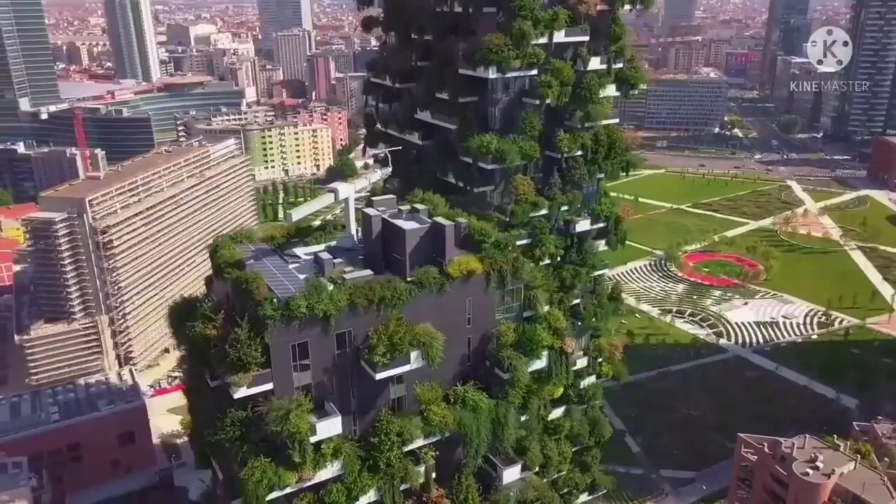When you read the phrase green building technology, someone with even a tiny amount of knowledge about engineering or construction materials would guess that it is associated with environmental conservation or something concerning the environment. Those with an IT background might think that GBT, green building technology, is a new piece of software for designing eco-friendly structures. Basically, if we learn how green building technology helps in the conservation of the environment and then try to adopt certain techniques to save the ecosystem through such measures, it will help our current situation a great deal.

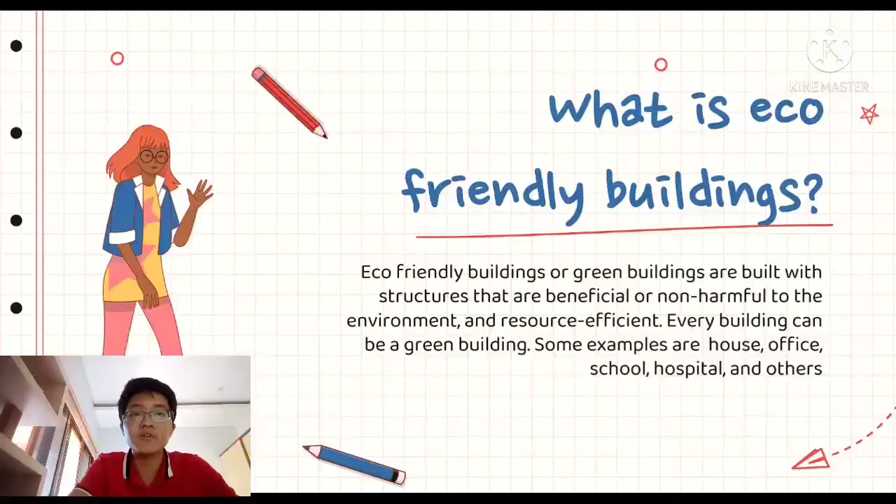From the video, we know what eco-friendly building is. Eco-friendly buildings are usually called green buildings. These are buildings built with a structure that is beneficial or non-harmful to the environment and resource efficient. Every building can be a green building, for example a school, house, office, and many other buildings.

Next is the history of eco-friendly building. Green buildings have been in existence from the moment humanity discovered construction, with growing calls for the construction industry to contribute towards sustainability efforts. The Building Research Establishment Environmental Assessment Method, or BREEAM, was initially set up in 1990. The Leadership in Energy and Environmental Design, or LEED, rating system on the other hand was established in 1998. These two entities were the pioneering oversight bodies with regards to setting the standard for building assessment, rating, and certification in line with environmental sustainability goals.

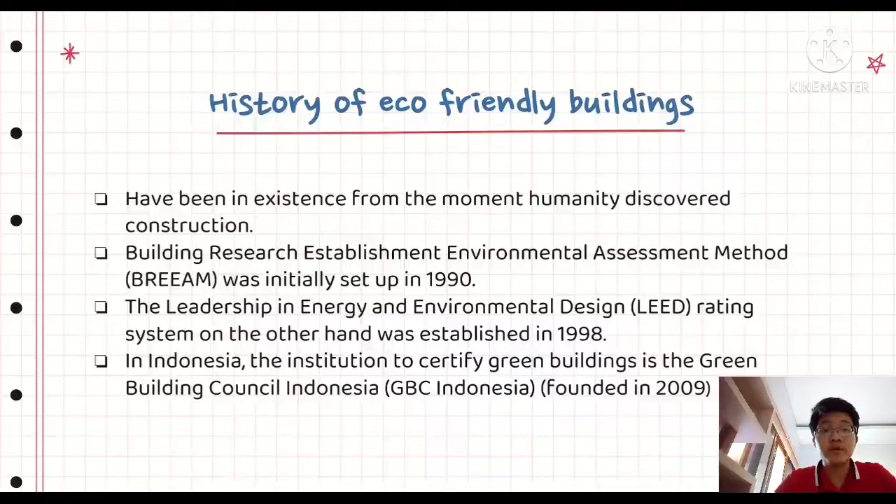In Indonesia, the institution to certify green buildings is the Green Building Council Indonesia, or GBC Indonesia. This institution was founded in 2009.

Next is the features of eco-friendly buildings. In green building construction, technology and buildings combine and create ecological resources that are the key to green success. Using simple and easily available materials, these are several features that can make a green building.

First, efficient use of energy, water, and other resources. Then, use of renewable energy such as solar energy. Next is pollution and waste reduction measures and the enabling of reuse and recycling. And next is good indoor environmental air quality and use of materials that are non-toxic, ethical, and sustainable.

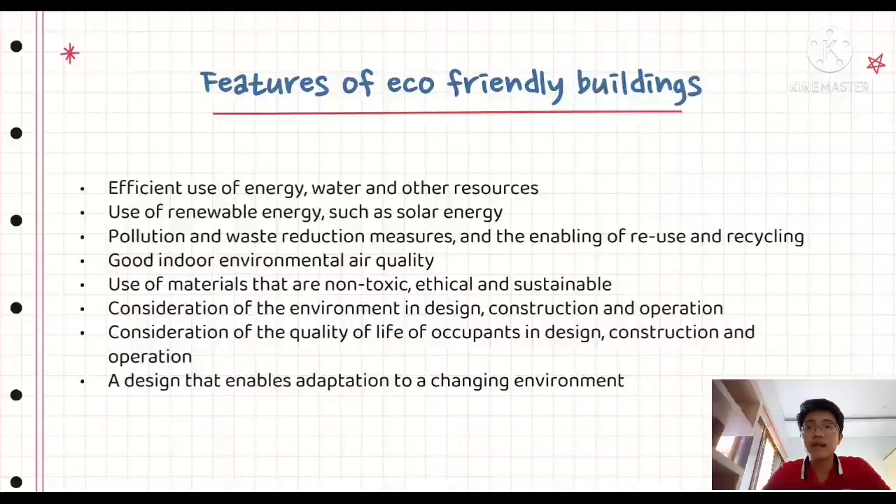Next is consideration of the environment in design, construction, and operation, and consideration of the quality of life of occupants in design, construction, and operation. And the last is a design that enables adaptation to a changing environment.

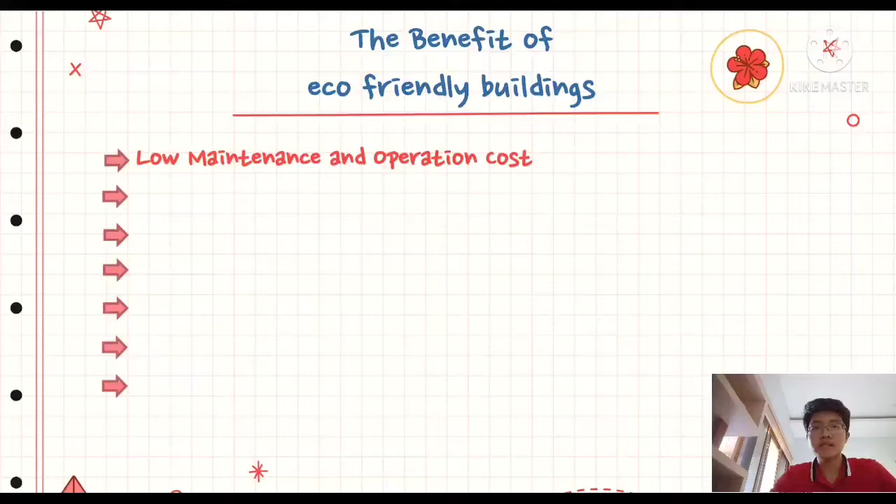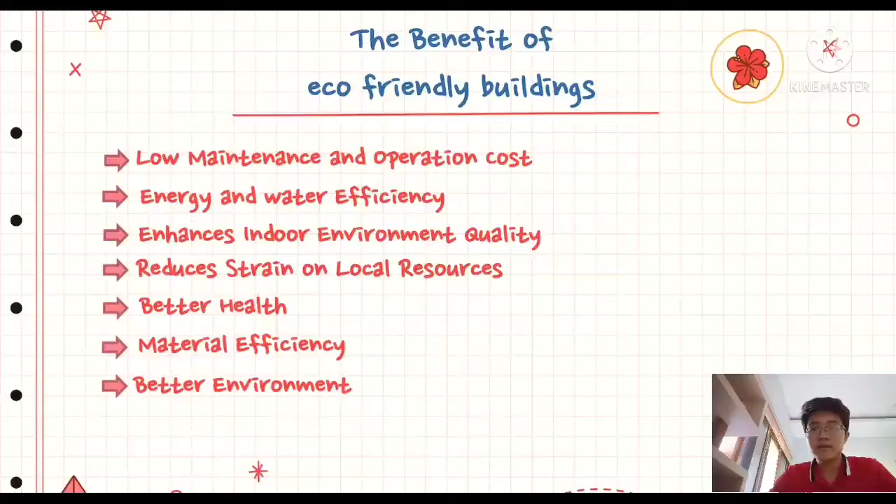Next is the benefits of eco-friendly building. The first benefit is low maintenance and operation costs. Then, energy and water efficiency. And enhanced indoor environment quality, reduced strain on local resources, better health, material efficiency, and the last is a better environment.

Next is some materials used for eco-friendly buildings. The first material is light steel. Light steel is one of the materials that can be recycled continuously. In addition, this steel is known to be strong against termite attack.

The second material is natural stone. Natural stone is a material that is easy to obtain. This material is usually used to add a natural feel to your building.

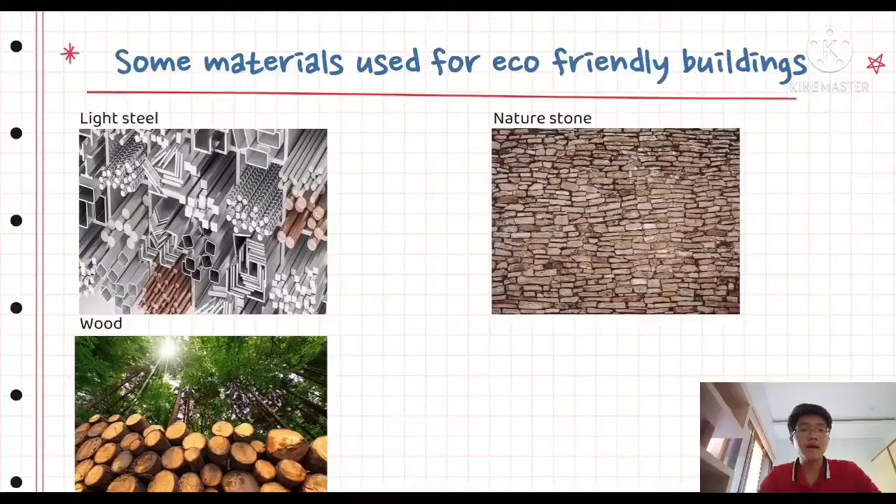The last material is wood. Wood is still favored by many people because it is easy to obtain and can be recycled for decoration and other building materials. In addition, wood is also known as a durable material and has a relative price depending on the type of wood.

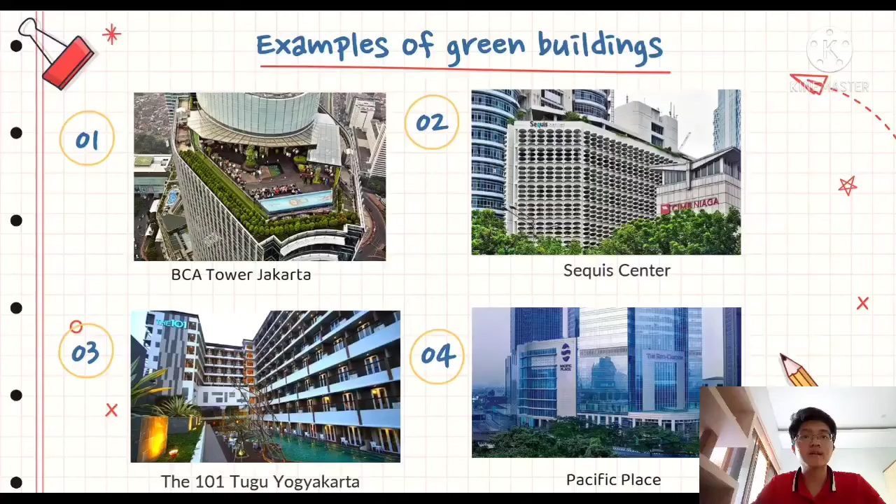These are examples of green buildings in Indonesia. All of these buildings have a Greenship certificate from GBCI, or Green Building Council Indonesia.

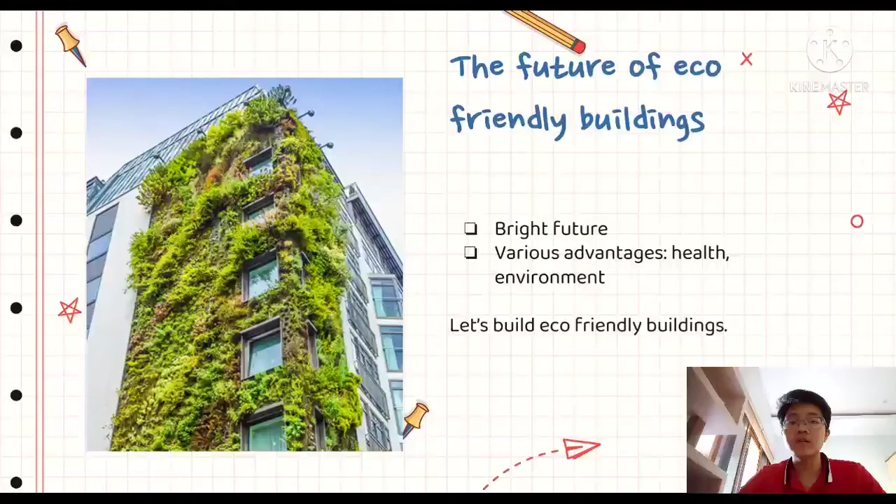The future of eco-friendly buildings looks very bright. Why? Because in my opinion, in the future, many people will use it.

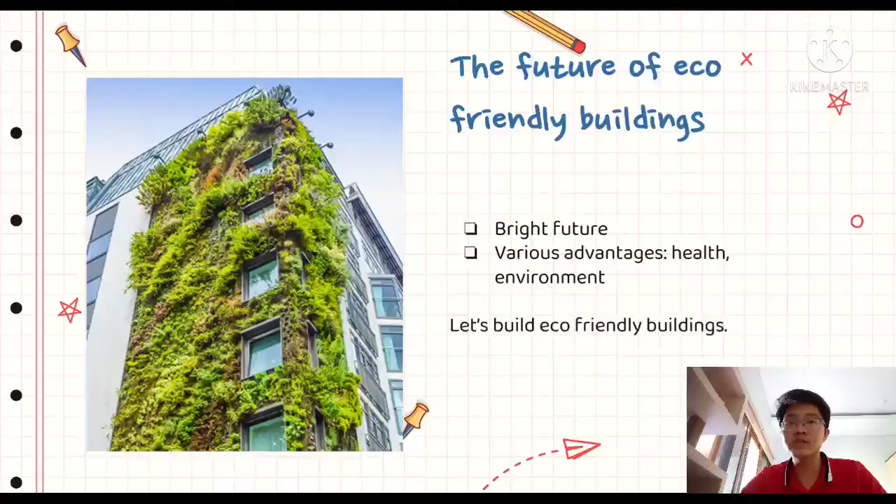We can get many advantages from eco-friendly buildings. One of them is we become healthy because of the safety materials used for construction. Not only that, eco-friendly buildings also improve environmental conditions. Therefore, let's build eco-friendly buildings.

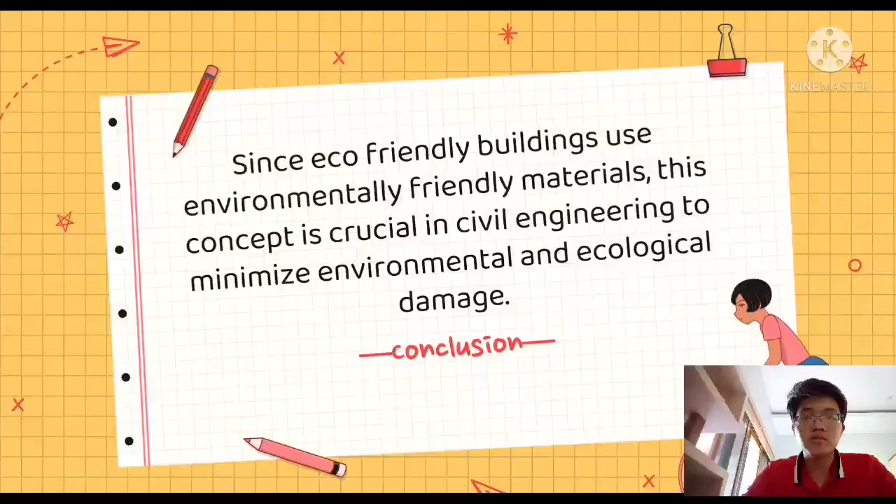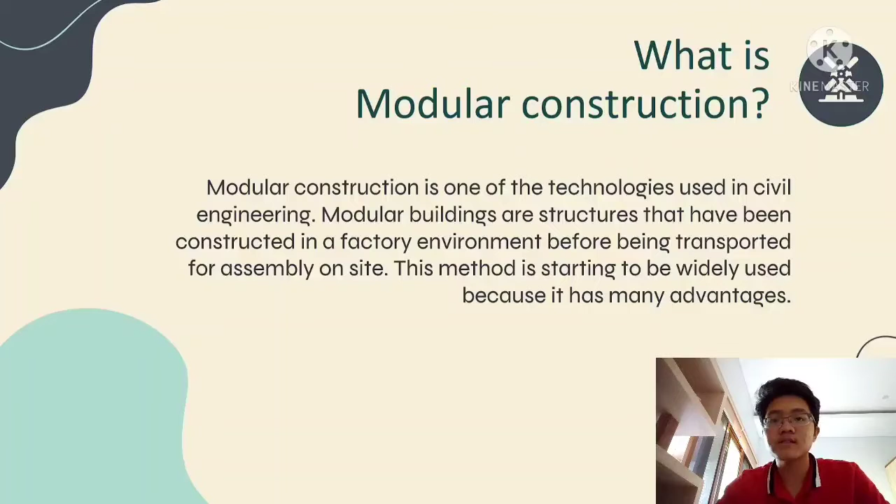The second presentation, I want to discuss modular construction, one of the technologies in civil engineering. What is modular construction? Modular construction is one of the technologies in civil engineering. Modular buildings are structures that have been constructed in a factory environment before being transported for assembly on site. This method is starting to be widely used because it has many advantages.

Next is the history of modular construction. Modular construction was discovered in the 1600s. In the 1800s, as the United States expanded westward, modular construction began to make a more prominent appearance. The demand for modular homes began to increase at the end of the 19th century. In the years after, the modular building industry expanded from homes into commercial projects.

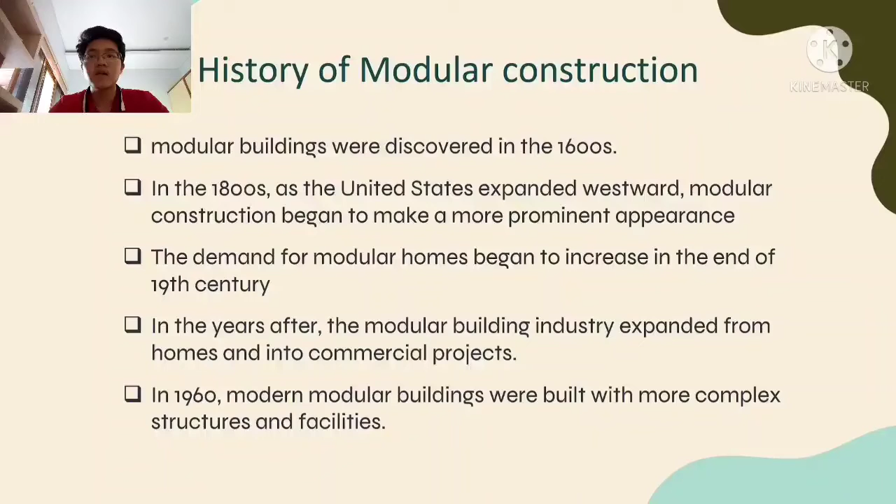In the 1960s, modular buildings were built with more complex structures and facilities, for example schools, offices, hospitals, and many other buildings.

Next is the types of modular construction. Modular construction has two types. The first type is permanent modular construction, usually called PMC. PMC is a sustainable and innovative building technique that utilizes offsite and lean manufacturing methods to prefabricate either single or multi-story structures in modular sections.

The second type is relocatable buildings, usually called RB. RB is a partially or completely assembled building that complies with state regulations and is constructed in a building manufacturing facility using a modular construction process.

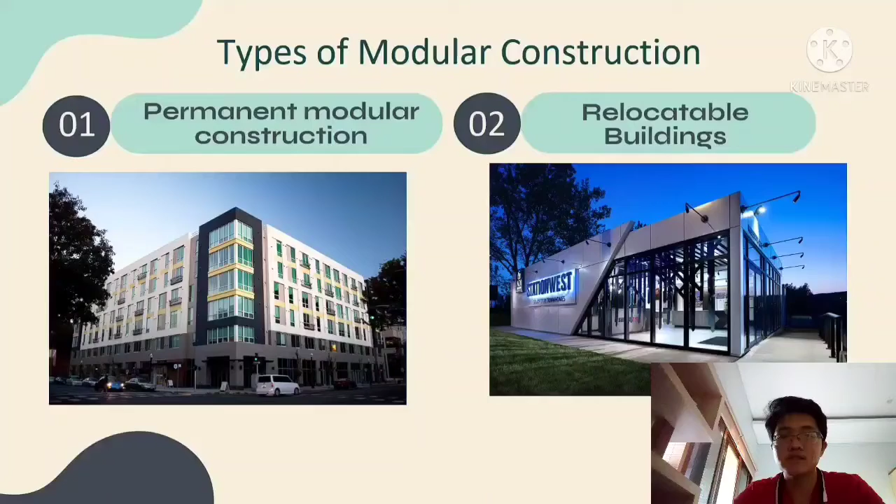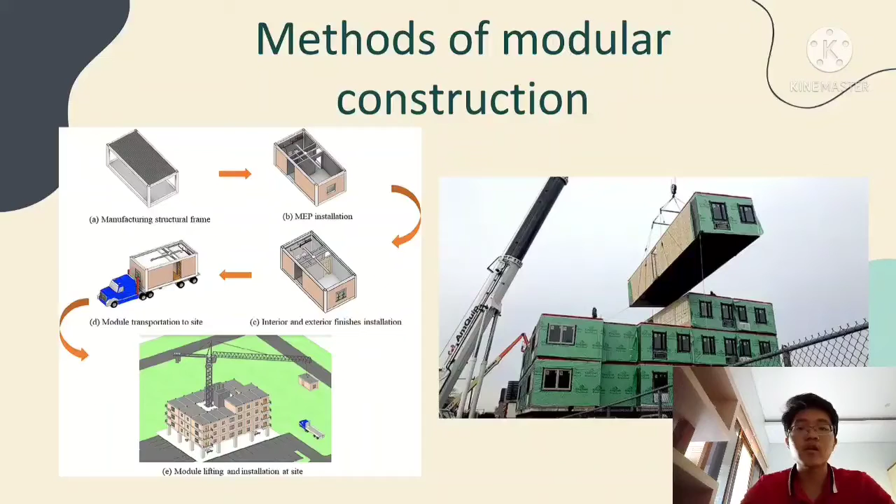The methods of modular construction: the first method, you build the structure. After building the structure, you install the MEP - mechanical, electrical, and plumbing. After you install MEP, you install the exterior and interior of the building. Then after that, the building is completed, and you can move in and use it.

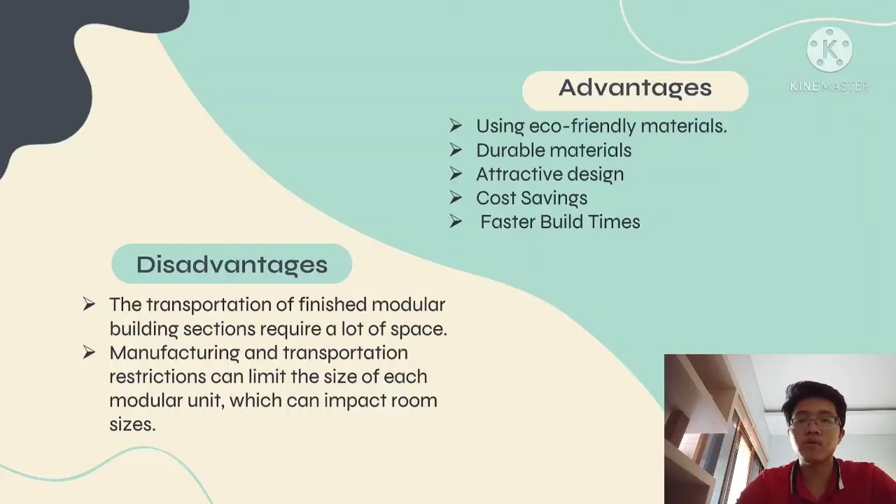The disadvantages are: the transportation of finished modular building sections requires a lot of space. The second is that manufacturing and transportation restrictions can limit the size of each modular unit, which can impact room size.

Examples of modular construction: the first example is the Nakagin Capsule Tower, a hotel located in Japan. The second is Wuhan Hospital, located in the city of Wuhan in China. By using modular construction, this hospital was built in only 9 days.

And then the last is the Alibaba office, located in Shanghai.

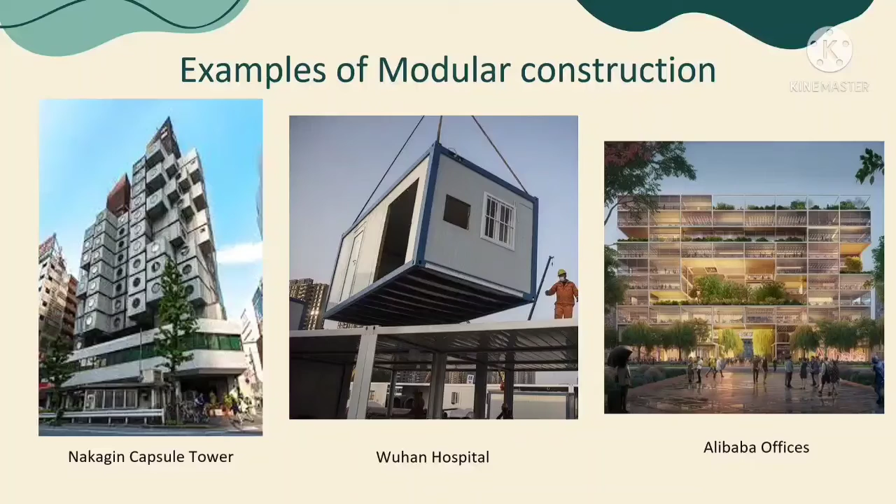The future of modular construction: in recent years, the development of modular construction is increasing so fast. In my opinion, this technology is one of the best technologies in civil engineering. Why? Because the benefits of this method are numerous, for example fast construction and lower cost.

Not only that, modular construction is also good for environmental health. Furthermore, this method has great opportunities in the future.